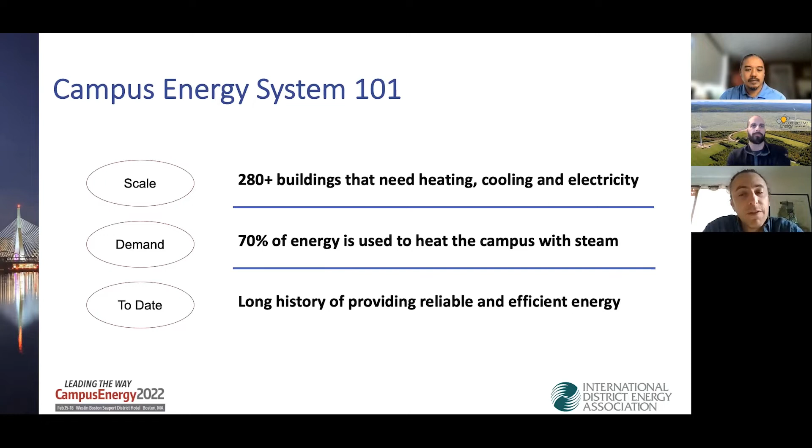So we currently use roughly 26 miles of pipes to distribute that steam heat across the campus, and we've been saying that that's a marathon of steam lines. We have a long history of providing the campus with reliable and efficient energy. Over the past decade, we have kept both energy demand and greenhouse gas emissions flat despite significant campus growth.

So UMass has an important responsibility as the largest emitter of all state agencies in the Commonwealth at roughly 15%. Our campus emissions are almost all related to buildings, 98% building related, with most of it going to heating the campus, so that is something to keep in mind as we dive into our technology solutions with you.

And we've kept our emissions flat, even with a substantial growth to our campus over the last decade or so. And we have exceeded the 2025 targets, but the challenge for us will be finding the emissions reductions needed to hit the state mandated target of 35% reductions by 2030 and 60% by 2040. And so the state looks to us to lead by example to fully decarbonize by 2050.

A quick note is that what we're presenting here is really just scope 1 and 2 emissions. It does not include scope 3, such as commuting, food systems, and embodied carbon and waste systems.

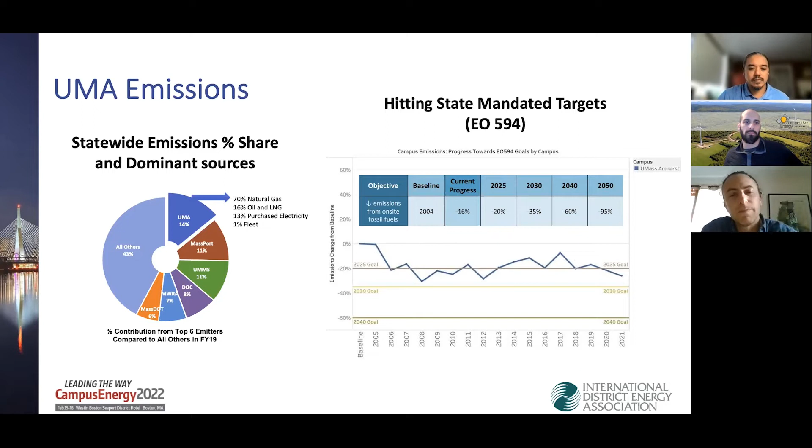So just to do a quick history lesson, we've been through multiple energy transitions in our 158-year history. Our first transition was to a district energy system, and this began with our first steam plant in 1910 and expanded with our coal plant in 1918. In the 1950s, we added the ability to make our own electricity through cogen. This was a cutting-edge technology at the time.

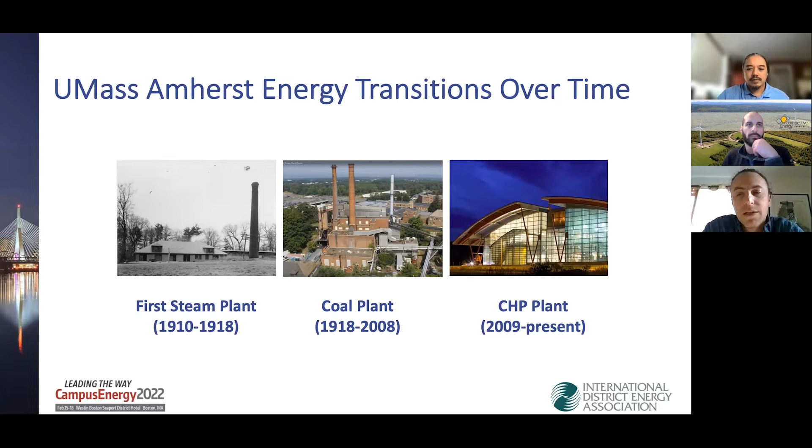In the early 2000s, we began our next transition away from the 90-year-old coal plant to a state-of-the-art natural gas plant. The award-winning CHP was completed in 2009. This currently provides campus with an affordable, reliable source of steam and electricity with much lower GHG emissions than our previous system. So as we transition to renewable energy, our study has focused primarily on that steam distribution system, that marathon of pipes, some of which are now 100 years old.

Since completion about a year ago of the study, it's provided a framework for us to understand what it would take for the campus to use 100% renewable energy. Though the study didn't provide a shovel-ready design or exact dollar figures, Ted's going to get into that a bit later, the study has rigorously assessed the phasing and overall costs of an energy transition. This is a starting point for the campus to imagine what it would take to become carbon neutral, and hopefully can be used as a resource and a tool for our campus leadership to work out what the next steps are to move this challenge forward.

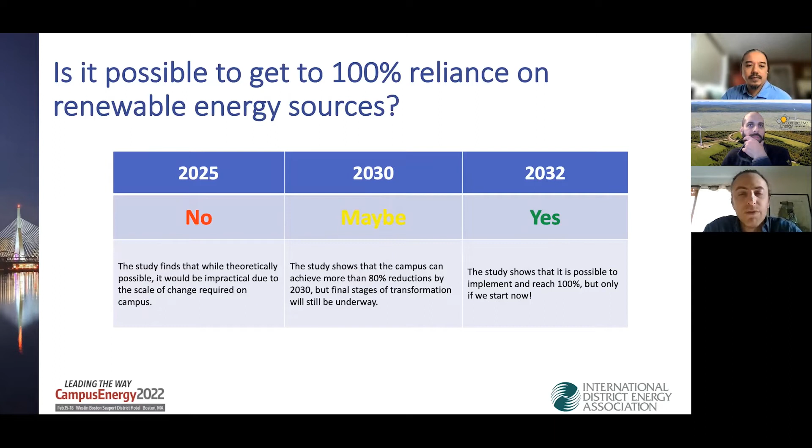So when the chancellor gives you a bold charge, you try your best to answer it. Is it possible to get to 100% reliance on renewable energy sources? We think the answer is no, but it might be theoretically possible - it would take an impractical level of investment and disruption to the campus over the next years. However, the study does outline a path to reach 80% reductions by 2030 and 100% by 2032.

So there are five key takeaways for UMass Amherst that we need to do. We need to commit to transitioning away from steam as soon as possible. As long as we're burning fossil fuels, we can't have 100% renewable energy, so we need to move away from the combustion of fuels. We need to continue to accelerate energy efficiency work to prepare our buildings for this new energy system.

We will continue to expand on-site solar, but we will have to procure more renewable electricity from the grid. Also, switching to a low temperature hot water system will unlock the potential for renewable thermal technologies on campus. And finally, it will take more than just pipes and solar panels. The energy transition presents a revolutionary opportunity for campus to use campus as a living lab for advancing sustainable education and research. Ted will also touch on this a bit later.

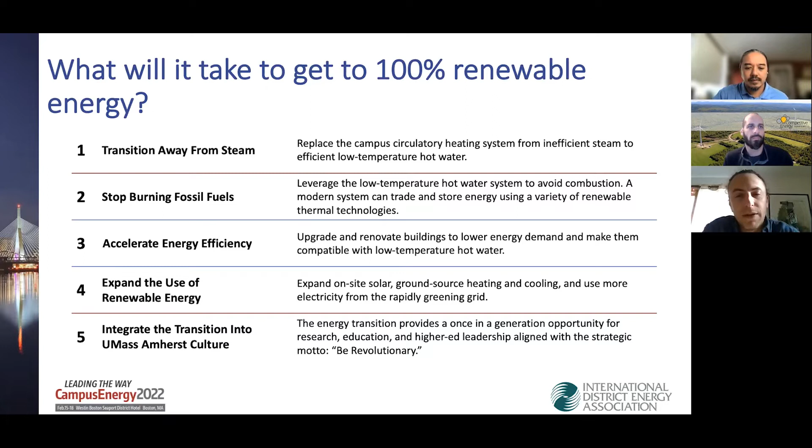So now over to Zac, who will dig a little bit more into our energy system now and what it will look like into the future.

Thanks, Ezra. As Ezra kind of outlined there, there's been a transition about three separate times. So let me set the stage a little bit for what's currently in the central heating plant. There's been a progression over time to create this microgrid to give more resiliency, and that started with the on-site combustion and generation, but it's really progressed over time to creating a transmission level service for electricity they need off the grid, but by and large, producing the vast majority of their energy needs through that steam distribution system and on-site generation.

So UMass has a handful of package boilers here that are kind of their backup as needed or supplementary, but the bulk of all the generation on site is coming from their own equipment, not from the grid. So UMass Amherst has the HRSG heat recovery steam generator, and all of these are really designed to run off of natural gas. Berkshire Gas, who does have the ability to curtail UMass Amherst up to 15 times a year, does so when the degree days are over 51, and in those days, there is no ability to meet everything through natural gas.

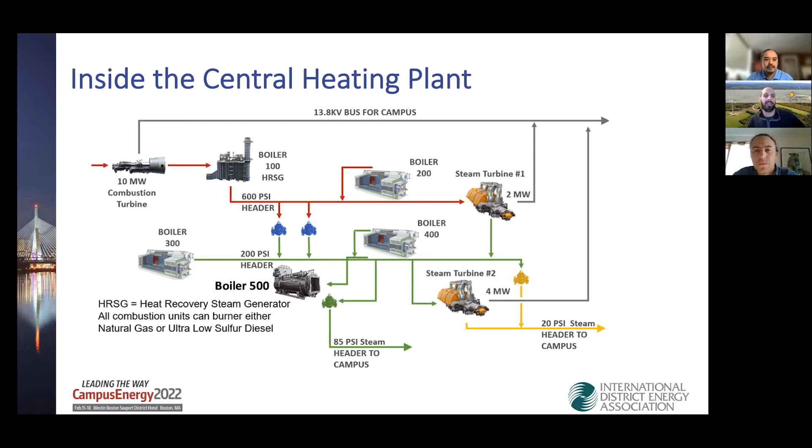In addition to that transmission level substation that was introduced, there was also some work as part of that to create a duct bank, which reconnected the east and the west side. This allows a lot more control for the operators of the equipment, but importantly, it also serves as kind of the benchmark or the foundation for this large distributed low temperature hot water system, which is what we'll get into in a little bit more detail here, as they progress away from the steam distribution, which has already happened in a handful of kind of satellite locations or portions of the UMass Amherst campus.

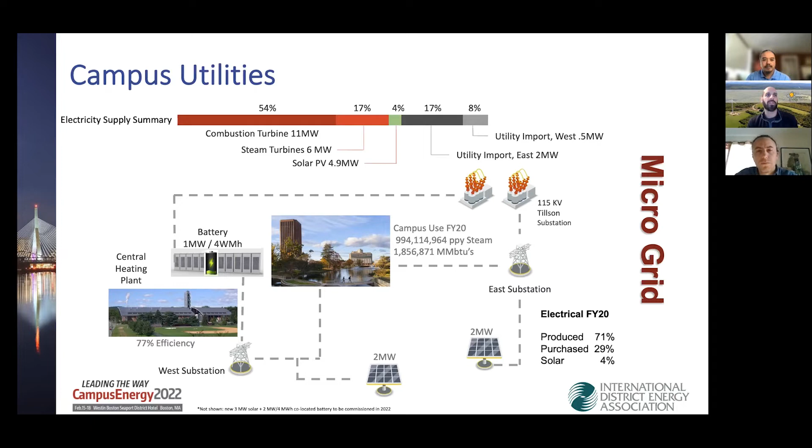So what would be the benefit of modernizing this district energy system that's already state of the art? Even though it is one of the most efficient combined heat plants in New England, the pure use of steam creates losses, both at the combustion from the fuel as well as the distribution through the steam system.

So one of the biggest outputs of a low temperature hot water transition is that it requires significantly less energy for the campus. And so even though the campus is growing, they can actually meet that with less source energy needs. It will also lower operational expenses quite a bit over time, as well as create a lot more thermal comfort.

A lot of the buildings don't actually have air conditioning yet. And so in addition to the same square footage being conditioned, there's also new things like air conditioning going into buildings that previously weren't. And so the last piece here, which Ted's going to touch on, is how this can be revolutionary and how that integrates into the living lab and integrating into curriculum and getting faculty, staff, and students to really understand and buy into this larger roadmap.

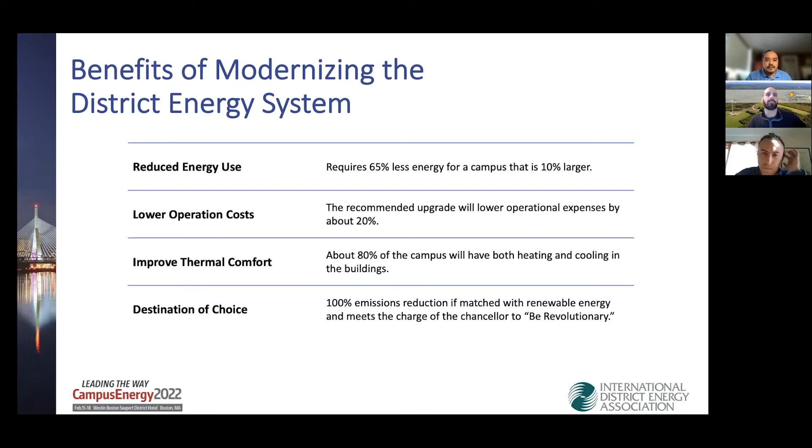So this is the current system as discussed. The bulk of the supply, the fuel, is coming from natural gas. And then the balance is imported grid electricity or on-site solar being generated. So all the gas is being used to create that thermal, as well as produce about 100 million kilowatt hours a year.

And so you can see in this existing system, we have the breakout of what is electricity, what's used for chilled water, and what's used for steam. And the balance there, which is a really big portion, is energy loss. So that's everything from the combustion and the distribution losses.

And so now when we think about the distribution, you can see that breakout of the energy loss, the heating, the cooling, and the electricity, as it makes its way through the system, and ultimately the conversion losses.

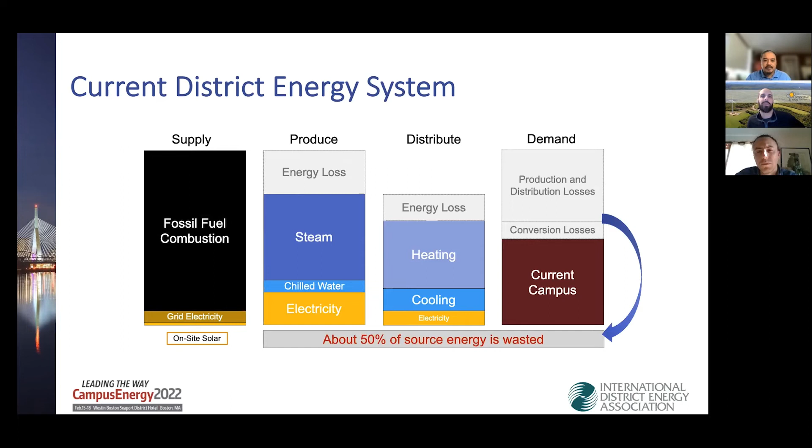So this is a big piece in moving to a new setup for infrastructure on campus that not only uses less carbon, but requires less energy to be purchased or produced on site. And so you can really get rid of all that production, distribution, and conversion loss, which ends up being about 50% of the source energy being wasted.

And so if we think, what does that future district energy system look like? It's really envisioning this new setup where your combustion is significantly reduced. There's a low temperature hot water system that moves energy around, which has much lower losses and can be used for the chilled water and for the electricity.

And because we're adding more square footage, as well as adding more air conditioning, there's a trade-off and balancing act that needs to be carefully considered. And so being able to actually add those spaces allows for better COP, or better efficiency of the system at large.

And so the end result here ends up being a demand that is growing, but is being met with less energy and less losses. And ultimately that equates to less operational expenses, as well as less maintenance on the system at large. And the final goal, which is reducing carbon.

And so as we think about this energy transition recommendation, over the last decade, unless there's just a really warm winter, we've been at somewhere around 125,000 metric tons of greenhouse gas emissions. And so as Ezra laid out in the beginning here, it is feasible by 2030. It's just not as likely unless there's really quick action to get all these projects moving.

Because this is not a 1 year or 2 year or 3 year project. This is a multi-year effort from design, construction, permitting, as well as the labor force and equipment necessary. So what we're showing here is kind of a wedge chart that gives you that breakdown of all the things that could be done to get you there by 2030.

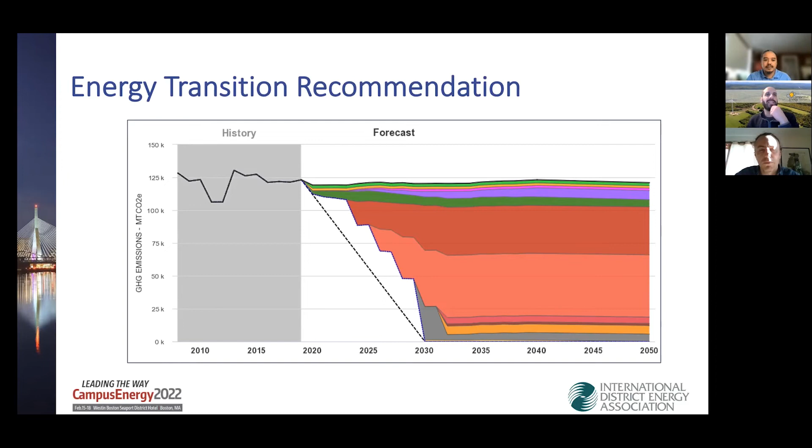So what does that actually mean? What are the key takeaways here? The first is it is technically possible and commercially available technology as of today. But to get to that transition, there needs to be aggressive action. And Ted will talk more about how that's already progressing here.

One of the other pieces here is that UMass Amherst, which is already the flagship campus of the UMass system, is set to be a leader in the Commonwealth and truly lead by example, not just in the classroom, but also in the environment and the community. And this will require a cultural shift.

As the chancellor said, be revolutionary. This is everything across the board, from educational research opportunities, as well as the leadership on campus, to get this larger cultural shift moving, which will enable the campus to continue to progress both with technologies as well as legislative and regulatory needs.

So with that, I would like to hand it over to Ted to talk about how UMass Amherst has already taken this larger plan and started to implement pieces of it to set them up to actually begin that larger shift. Thanks a lot, Zach.

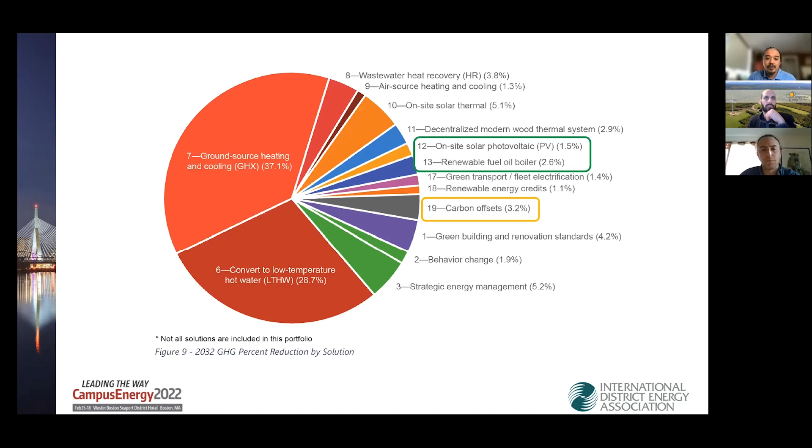An important point for us also is that we're not planning to buy many carbon offsets to achieve our goals. Thus, we're putting more weight on the successful implementation of this closed loop approach. Without its success, we would not be able to achieve carbon neutrality in a true sense.

Now, our proof of concept scope looks at establishing this system between a head end on the west side of campus and a handful of buildings in the southwest region. There are 42 buildings included in our scope, compared to the almost 300 that make up our full main campus portfolio. The full RFP is to complete a schematic design with cost estimate of a fully functional new system.

This includes a deep dive into each building to convert them from energy using systems into energy exchanging systems. This also looks at building envelope upgrades to minimize HVAC sizing and upfront investments. And more so, we're looking at ways to reuse our abandoned steam pathways to minimize trenching investments of the new underground piping.

And since this proof of concept is a major endeavor in and of itself, optionally, we're also considering a reduced scope, meaning just looking at the geothermal analysis on the west side. This would answer the question, how much geothermal capacity do we need to support campus?

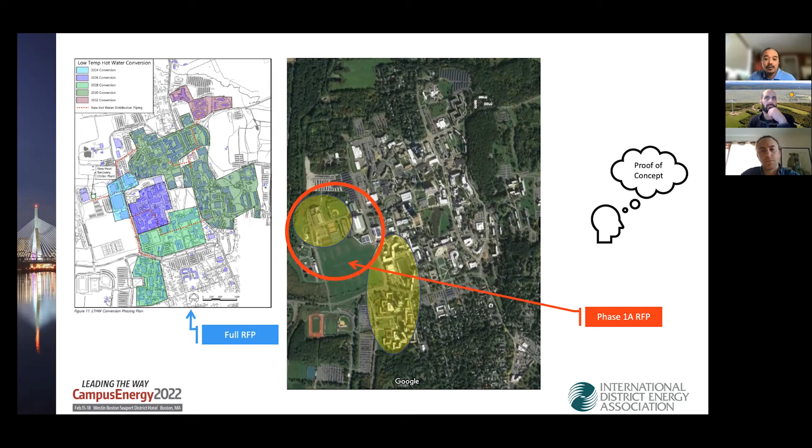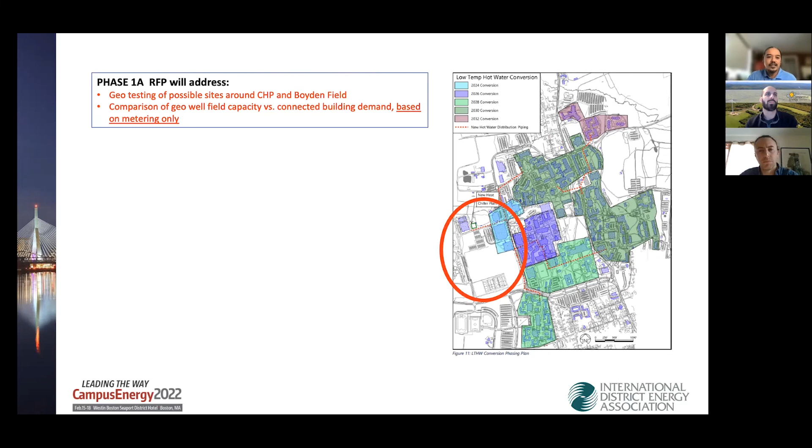So what does that reduced scope give us versus the full? The reduced scope gives us estimated geothermal capacity, but in addition, although we'll not look at each inside of each of the buildings, we can still figure out the building side demand, but it would likely be based on meter data and engineering assumptions. On the other hand, the full RFP would give us building side demand that's based on existing conditions, as-built systems, and detailed load calculations.

And in addition, we gain lots of other knowledge seen here that is needed as we continue decarbonization across campus, including an establishment of our own campus-specific design standards for the new system. And we can now start to unitize the cost from our 42 building analysis and extrapolate it to the rest of our building portfolio. This more accurate estimate will help shape current and future projects so we can minimize lost investments and make well-informed decisions. Cost-wise, the full RFP is about 3 times the cost of the reduced scope.

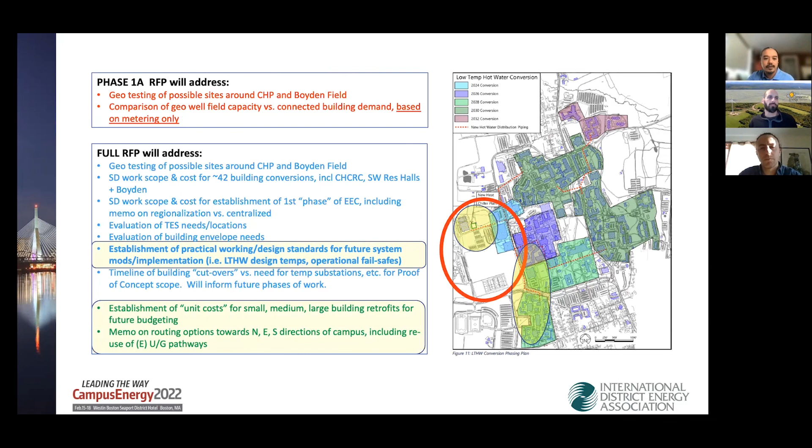So outside of the obvious goal to divest from fossil fuels, our research so far has found that no campus of our size or type has yet completed decarbonization. So as a flagship campus for the state, and Massachusetts state being an energy leader for the nation, we're motivated to lead by example for society at large.

Regarding state and federal funding, we understand that federal funding will likely be passed through the state, but will not yield much for the UMass system. Also, state politics will play a key role as both our governor and lieutenant governor are not seeking re-election. Alternately, we're exploring creative ways to establish funds and bonds, and maybe even offer carbon credits to build in-house capital. Currently, we're focused on developing ready-made narratives to position us for any of these future offerings.

As a final point, we feel our management structure provides a unique approach to a task that we all eventually will have to face. Our multi-team collaboration empowers us to address the complexities of sustainability in real time and nurture a deeper commitment from us that is engaging and worthwhile. We believe this living, learning, and teaching approach positions UMass as a model for its occupants and others for years to come.